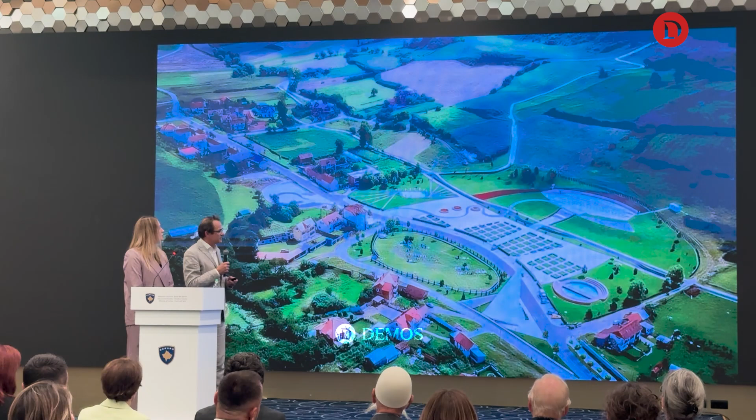Allow me, this is the current situation as you know it now, and we have revisited the entire design with all its elements, and this is how we envisage it now that it shall become. You see, we have created an arch embedded in the landscape, pushing towards the hill.

At its pitch, the arch holds the tombs of the family. They are untouched, they are in the position as they are now. If we create that protecting gesture around it, and also inviting gesture, so that the visitors can walk and approach it.

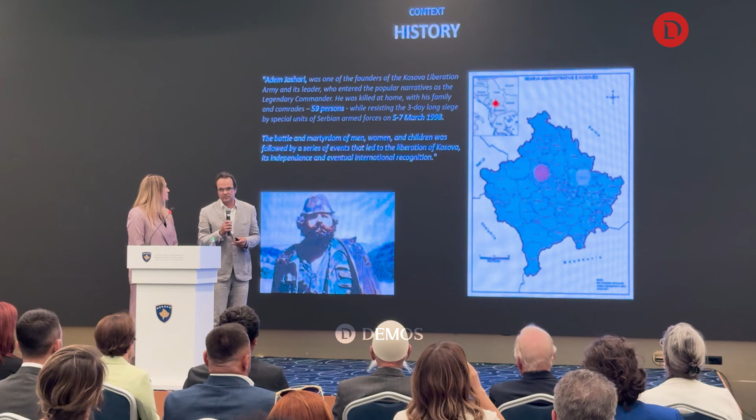That pivotal, in earlier discussions, really nation-building location and event, and it should be that not only today, it should be that for the future. And so we need to design very carefully the place that we see as it is today.

The path to the watchtower and the entire site of the ammunition factory. We have started to phrase a manifesto.

And I believe as we move on in the project, we will further distill what this memorial is really about, and with your help, we will be very able to do that, I believe.

So a memorial landscape that tells the history of Kosovo's resistance and tells the history to everyone, not only the Kosovars. They are like lanterns, like light beacons that put the focal point to this place.

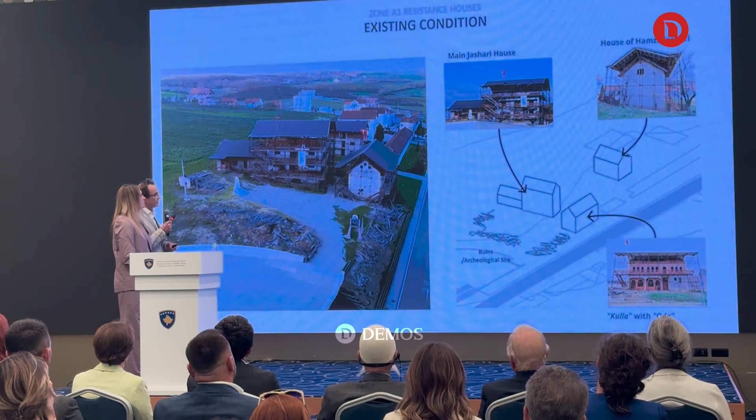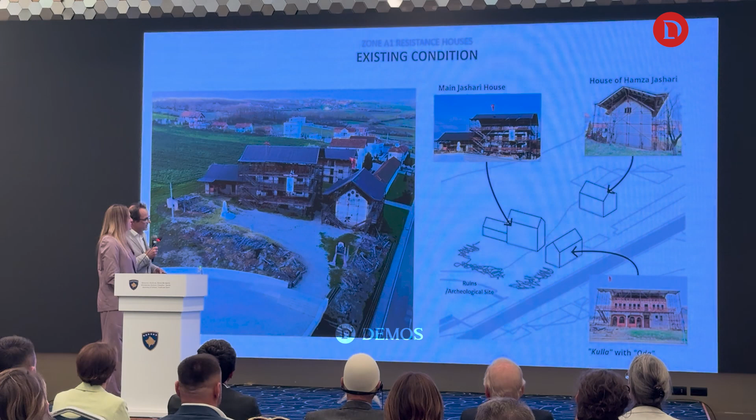So the houses of the resistance, as we see them now with their protecting scaffolding from 1998, as we understand, and those houses that were in front already at that time entirely destroyed.

What we want to do here is we want to obviously preserve them, but we also want to give them, with this preservation casing, putting them almost in a shrine.

With full transparency at eye level where the visitors come, so we can see and go very close and see everything as much as we can bear seeing.

But the encasing is much bigger than the houses. So there's also this notion that it is much bigger than the actual houses.

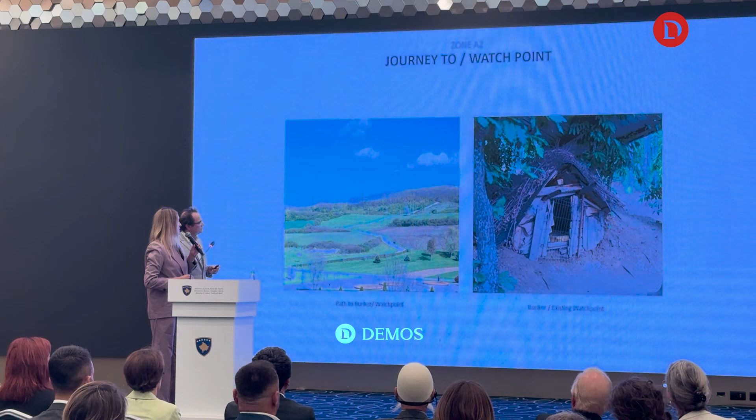And at different moments you'll be able to look out over the entire site and get another piece of the story from that specific view in the landscape, which you can see here. And so we've identified these specific areas.

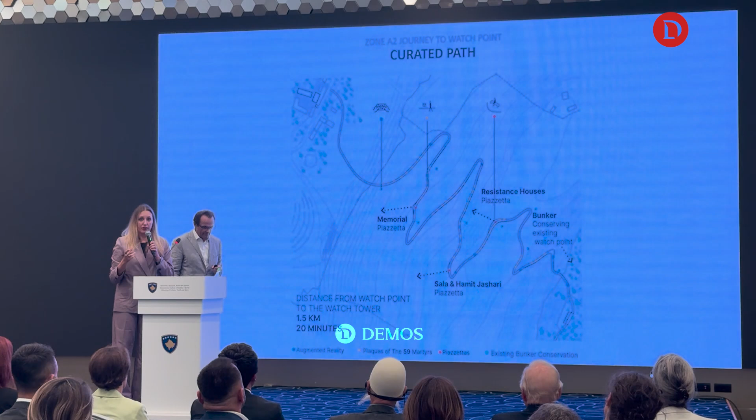There will be an overlay of digital interpretation that you can access through a digital device. There will be audio interpretation added, as well as, again, that physical kind of text that you're able to see.

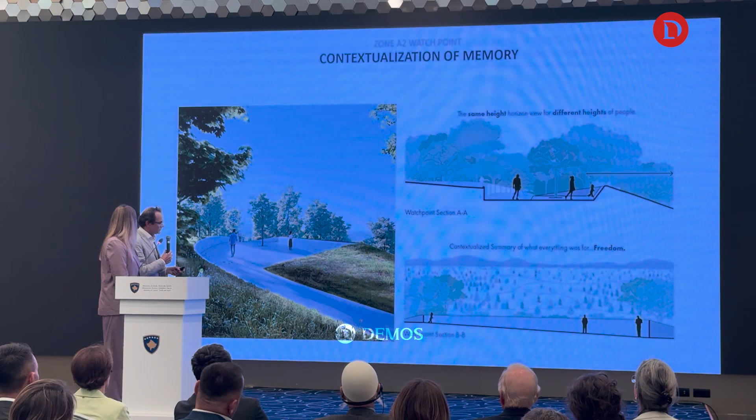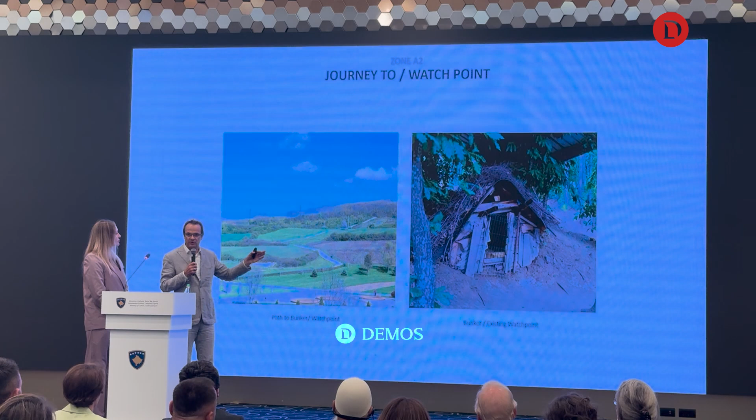From a conservation point of view, it will be, if you allow me to go back, obviously quite a challenge to preserve that watch point, as it is not a structure of duration, and we are in discussion with our conservationists how we can deal with that.

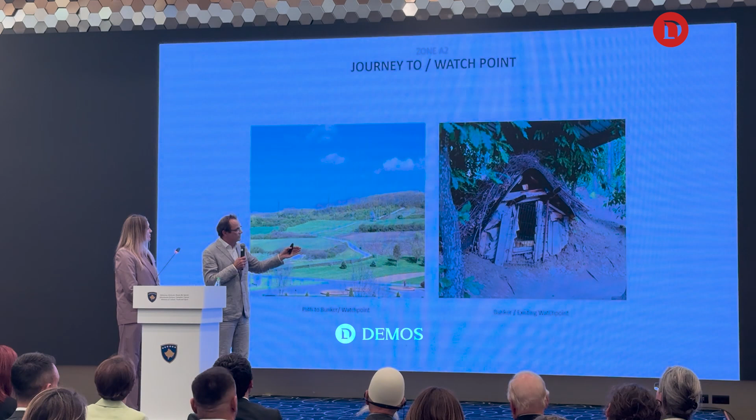Is it important that it's the original materials, or is it maybe the right thing, when it has deteriorated, to build it afresh from the same material, to have it in the right place and the way it was constructed and built back then.

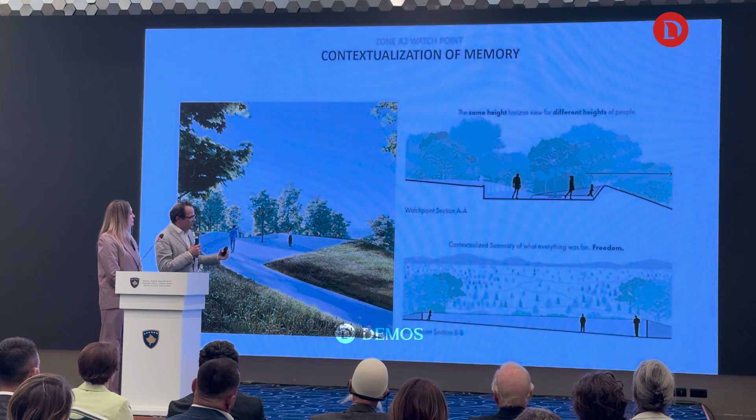So our intervention would be away from that actual watch point, because we don't expect visitors to actually go into that watch point, but we brought that story to the forefront. That's really what we wanted to do here with a more minimal interpretive element, so that it really is about that experience and your internal processing of what they were seeing and what was happening.

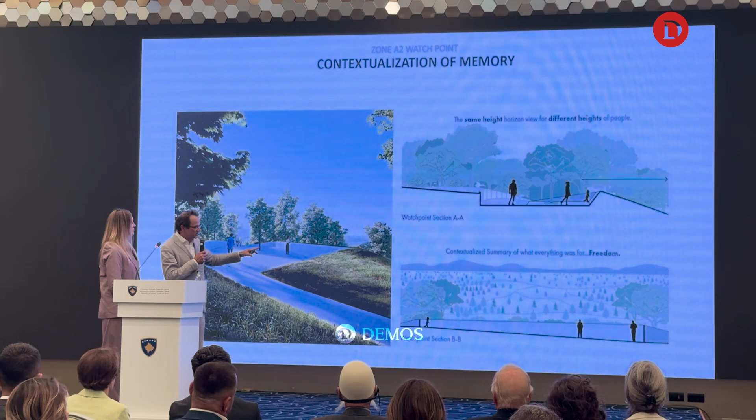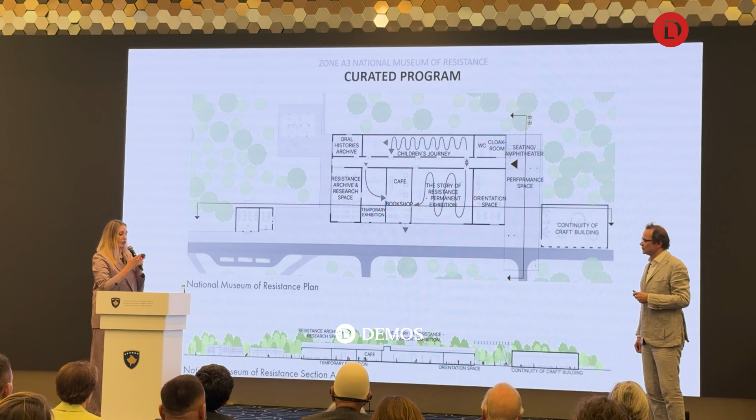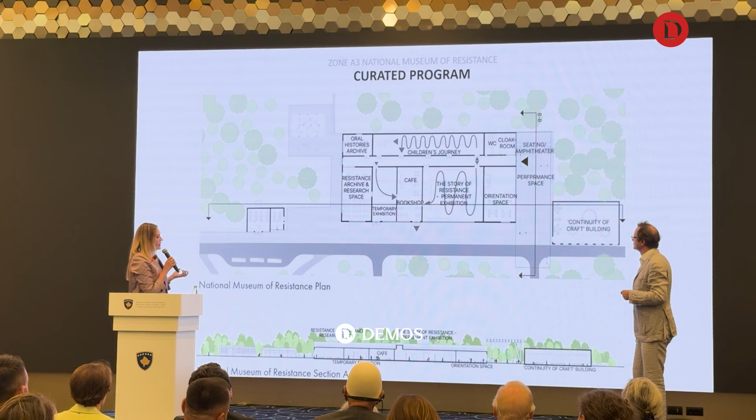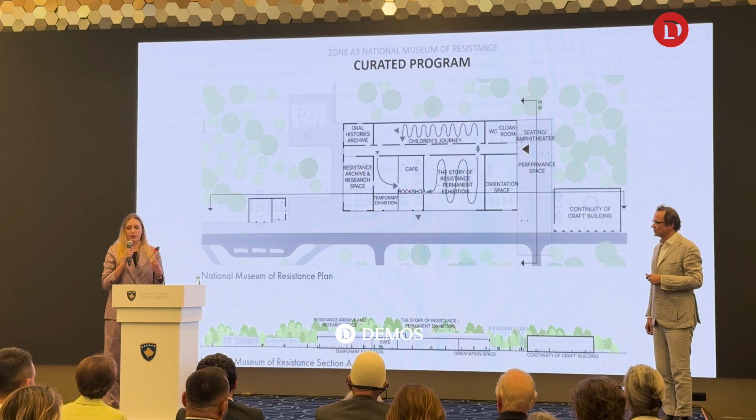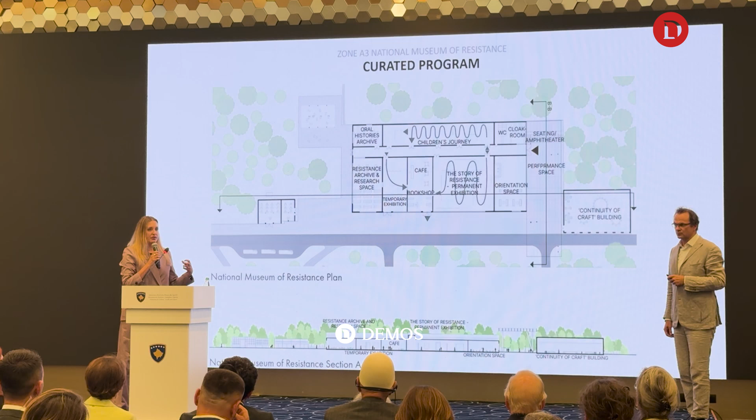Now, the next large space is the story of resistance. This is the permanent exhibition. In this space, it's the story of a family, the Jashari family, and all of the families like them who contributed to the resistance all around Kosovo. It's a place for people to unpack the idea of resistance in the past, but also what that means as a continuous practice—what it means to continue to celebrate that freedom and fight for it.

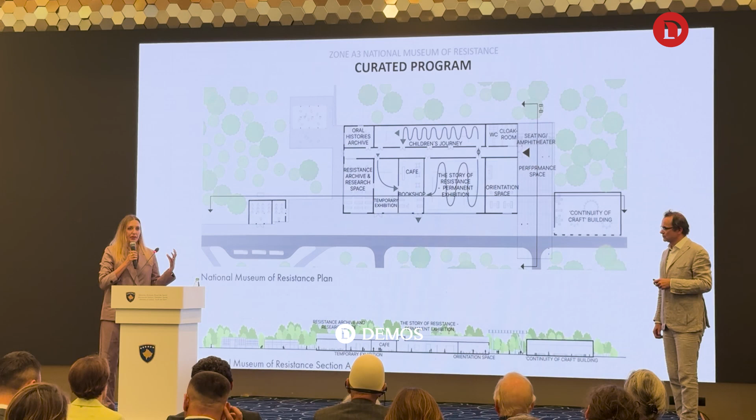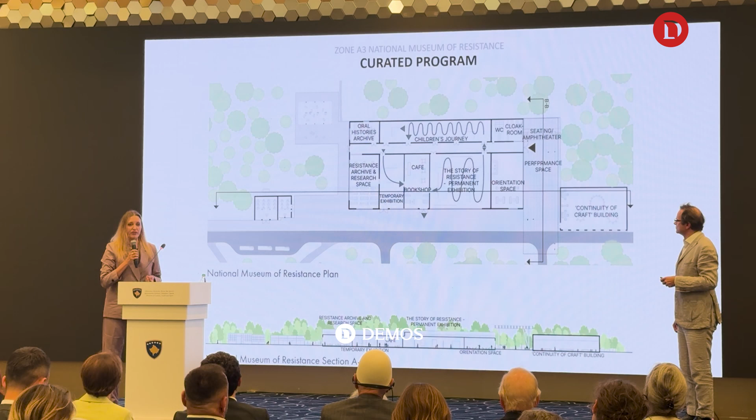We envision this as being really a focal point for this entire idea across the nation. So again, with the Jashari family, but really bringing it out and bringing together all of the different sites across the nation. With the artifacts that we think should be displayed here, we also would like to include audiovisual elements, a special exhibit for women's contributions to the resistance, and additional content as we uncovered during the research.

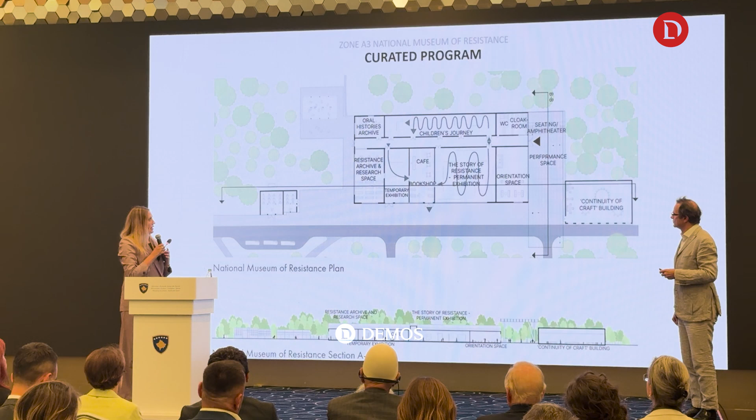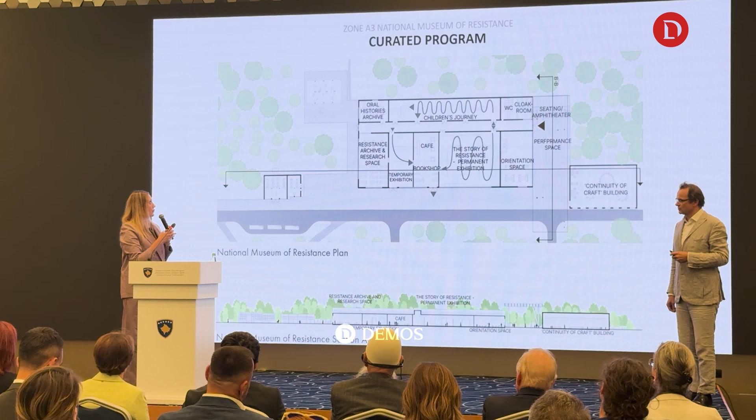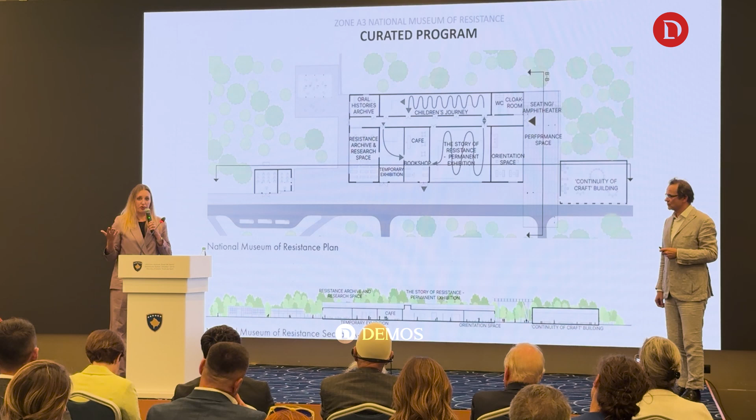Next, we're moving to the children's journey. This is a special space for younger people to be able to process and unpack this story, which is a complex one, an emotional one. This is really to help children understand their history and be inspired by it. This is a place where young people can come with their families, where school groups can come, and which also talks about children's role in the resistance, because there were many children who also contributed very much to what happened in those events.

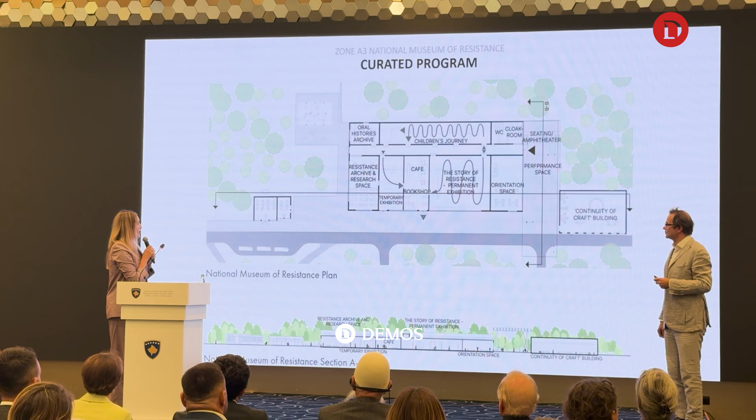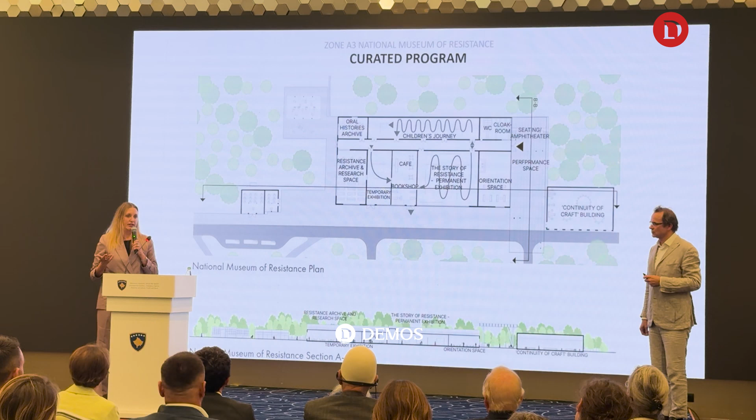From the children's journey, we move into the oral histories archive. We think this is a very important space here. It's a small one, but there's a big opportunity to be able to collect the oral histories from the people who lived through these events. This is a space where that can happen, either through audio recordings or video, to be able to collect them and have this archive available for perpetuity, for people to research in the future.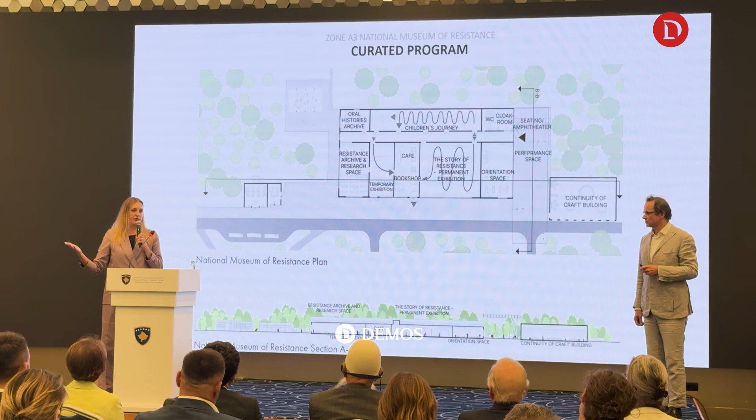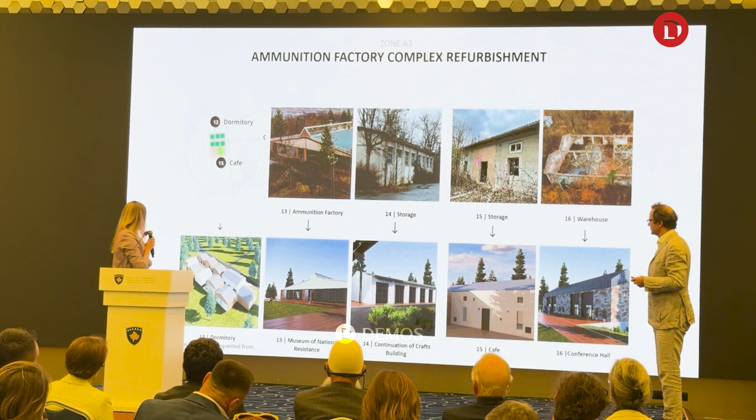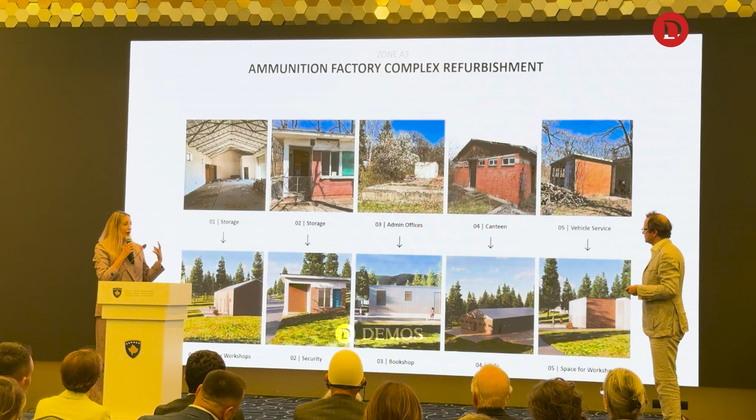Different spaces have been transformed. We have the ammunition factory that we've just talked about, the Museum of National Resistance. We have a dormitory for visiting researchers. We have the continuation of the crafts building, a cafe, and a conference hall, where dignitaries can come, where talks and meetings can happen, where performances can happen as well.

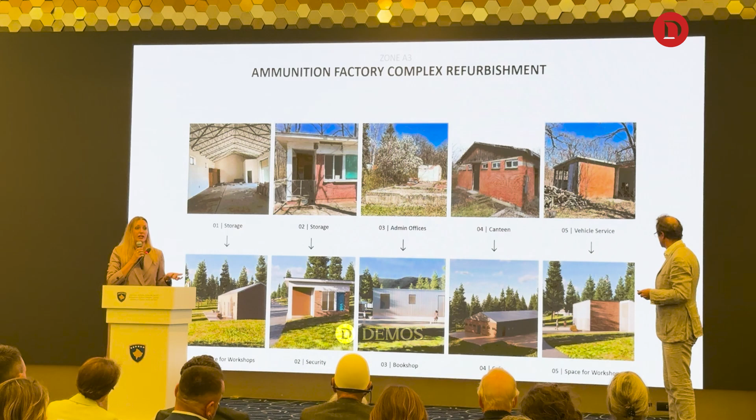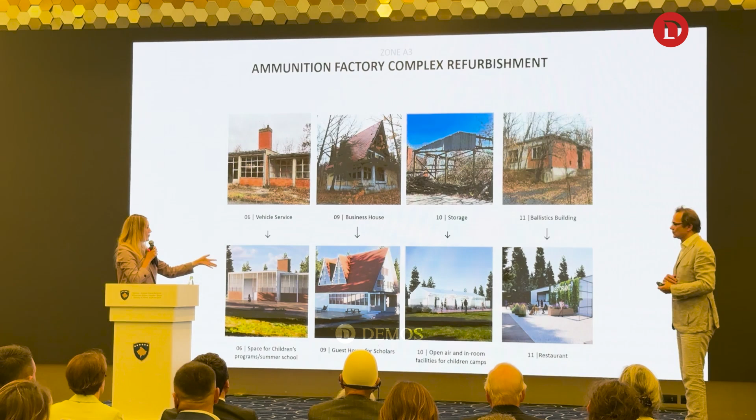We also have space for workshops, security, a bookshop—again, passing on the knowledge—cafes that are really celebrating the cuisine of Kosovo and the farmers who live around the memorial site, as well as space for children's programs, summer schools, a guest house for scholars who are there to research, children's facilities for children's camps, and again, a restaurant.